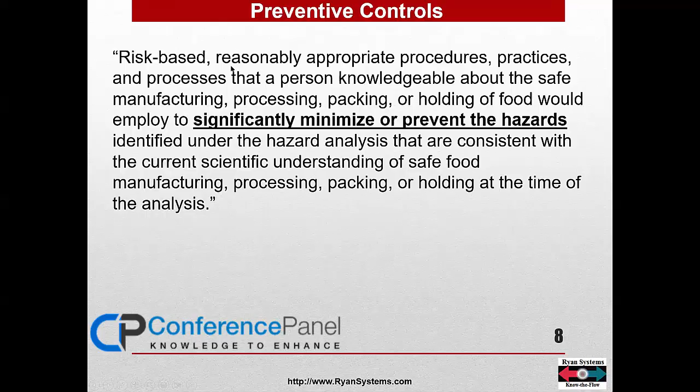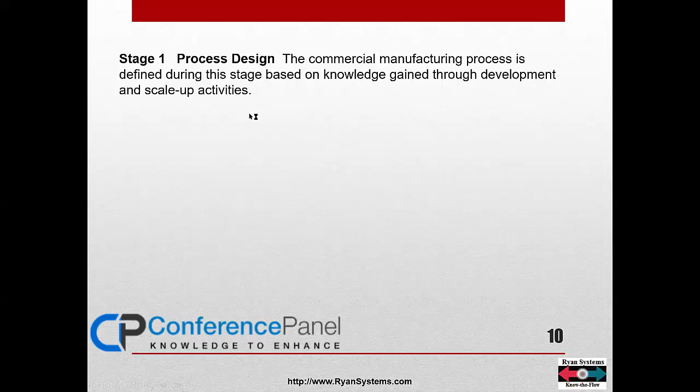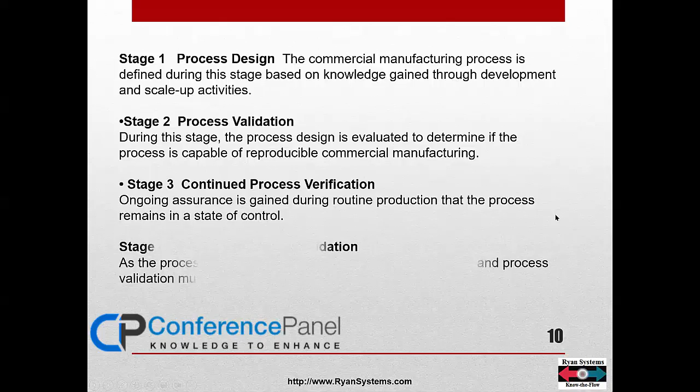This is preventive. In the preventive control system, you have to design your process, then validate that process, and then you're going to re-evaluate that process on a routine basis, and continually provide process validation.

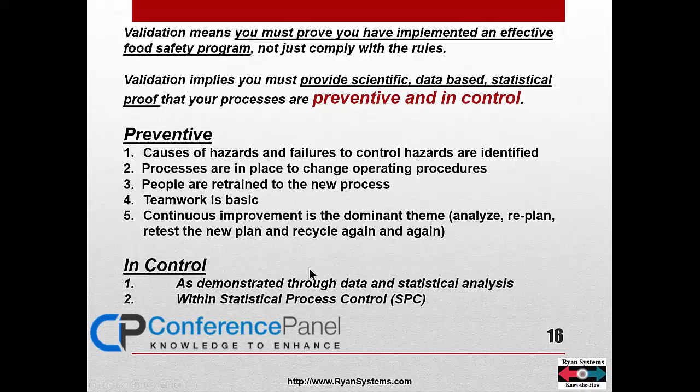Risk assessment and designation is based on the following factors. You should have done all this risk assessment. Validation means you have implemented an effective food safety program, not just complied with the rules. Demonstrated through data and statistical analysis within statistical process control requirements.

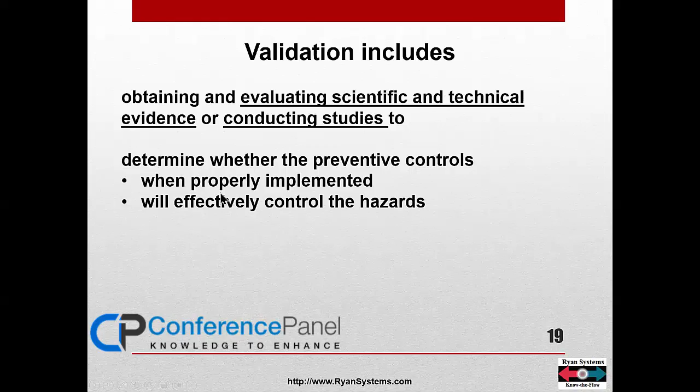Back to our outcome variables—eliminating illness and death by reducing or eliminating any of these or more. Validation includes obtaining and evaluating scientific and technical evidence, or conducting studies, to determine whether the preventive controls, when properly implemented, will effectively control the hazards.

Validation means to control this variation. So I'm going to talk about how you know your own measurements are valid. Move from analog to digital measurement. A single problem may take weeks to fix. Recycle action—keep doing your action items. Keep what shows up as working in the data. Throw away things that don't seem to be working.

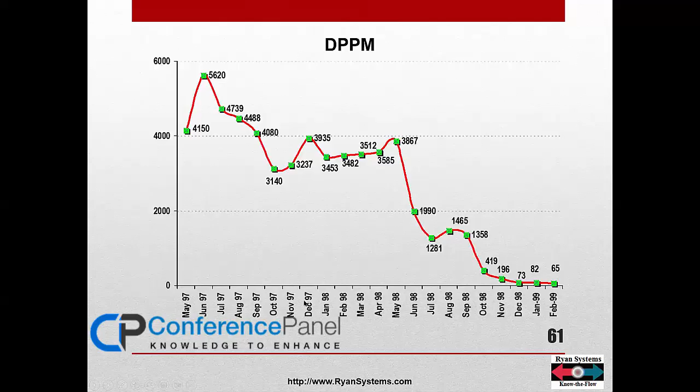Here it is: I have an upper management team, quality and food safety planning team, functional improvement team, and corrective action team—these are the most important people right here. Functional, cross-functional team, or functional improvement team, and specialized teams, process control.

Dealing with teams means you're giving the team the authority and the responsibility, the power to make changes. Okay, difference between a group and a team.

You work in a group. You work in the same functional unit. You have your own job. You get recognized or you don't. Rewards are for the individual. Boss runs the show—normal org chart. A team works together with focus.

Reports team status—I showed you the sheet. There's the members of a team. Organization: there's a facilitator who has to be picked based on his or her ability to explain things clearly and take suggestions, not boss the team.

Team rules: they meet at the same time, same place, every week. They meet for one hour. Agenda and team meeting updates are delivered to every team member within a day.

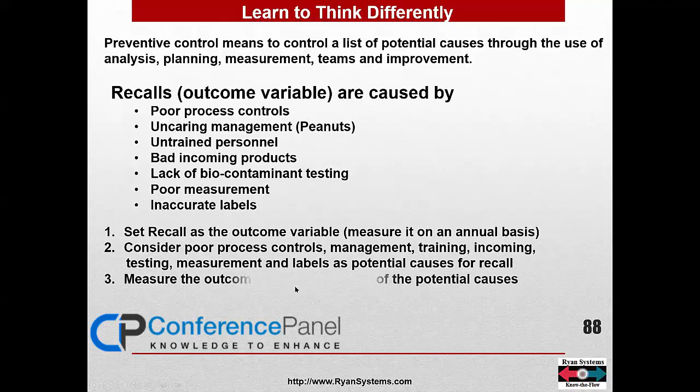Preventive controls mean to control a list of potential causes through the use of analysis, planning, measurement, teams, and improvement. Process variables—set recall as the outcome variable. Consider poor process controls: management, training, etc., as causes for recall. Measure the outcome variable for each cause.

Train your people to team up and work to get over each potential cause, and do it over and over again.